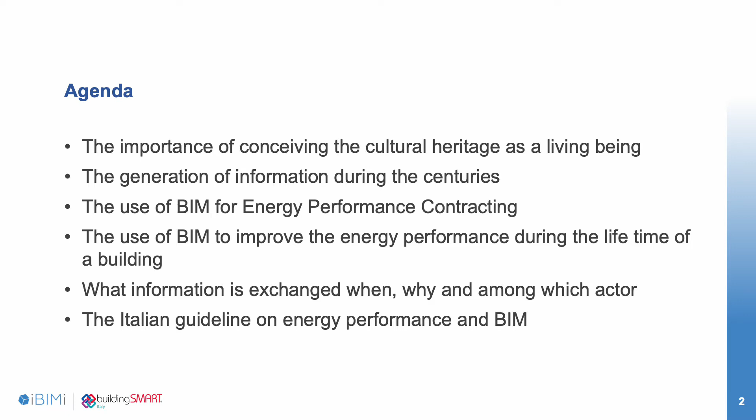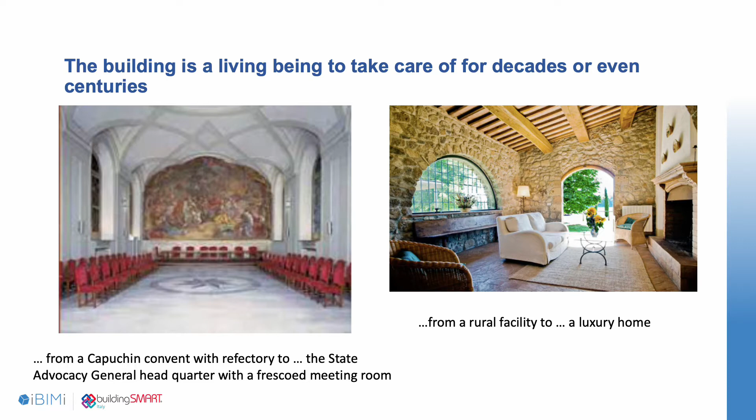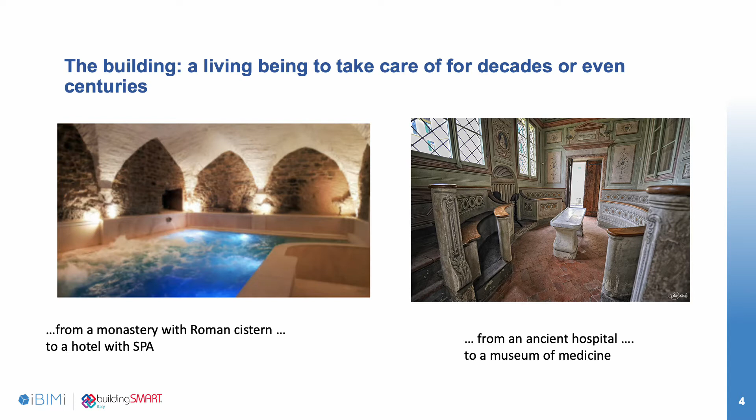A building may have been conceived and built in the Middle Ages, then be adapted in the Renaissance, and nowadays may need a change of use or energy requalification. But even more modern buildings that were built 20-30 years ago may need renovation. All the information that can be collected from what exists, if available, will be in analogical format, and in any case it will not directly be processable by software.

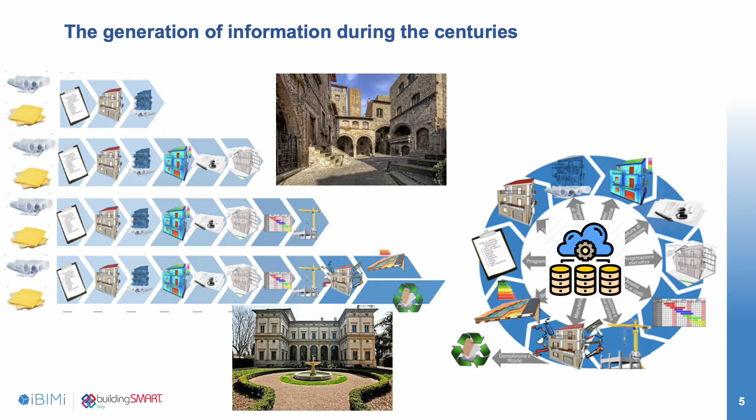Therefore, BIM for existing buildings means, first of all, to collect the information in a systematic way, to verify its correspondence with the reality, and then to make informed decisions based on simulations obtainable with software.

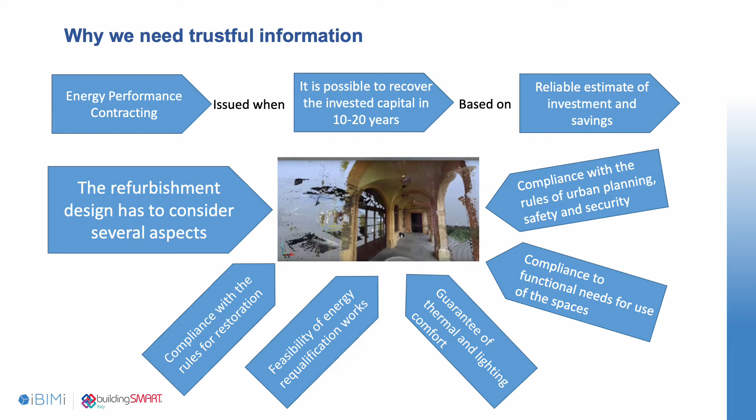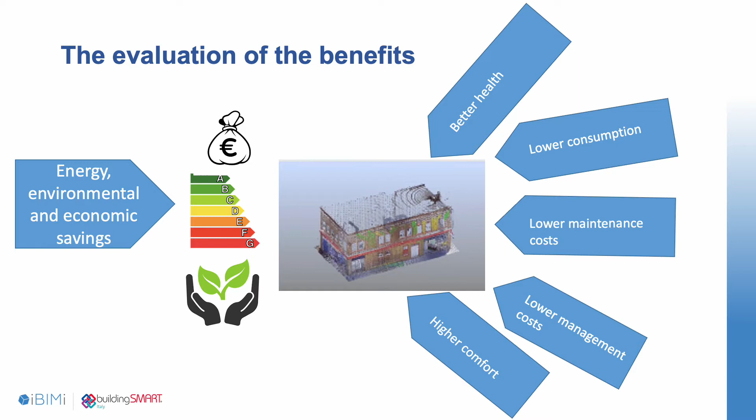On this basis, the evaluation of different scenarios can be made and reliable computational data can be obtained through BIM 4D and BIM 5D for the evaluation of time and costs. This is very important for the owner, who can make informed decisions.

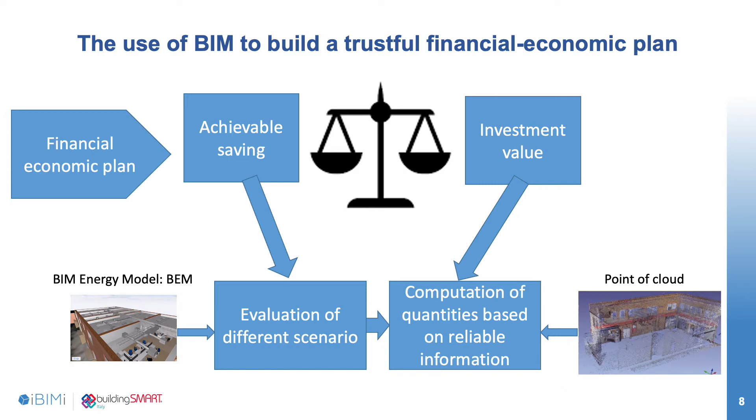BIM is always important when looking at the entire life cycle, as we know that the building sector is one of the highest impact on the environment because of the continuous use of the soil, emissions deriving from the materials used, emissions during the construction, and above all emissions during the use.

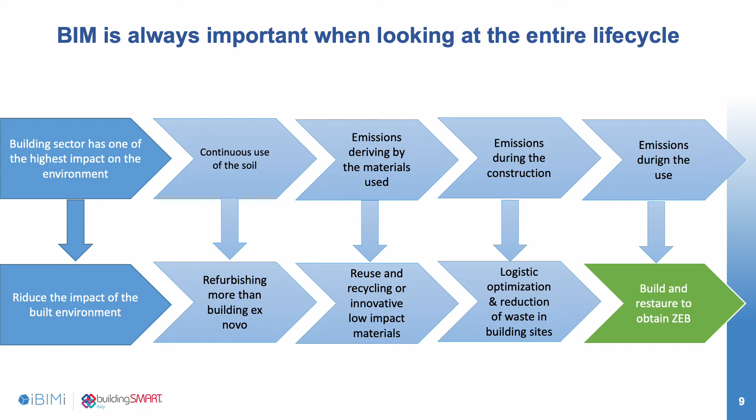Through an extended use of BIM, it's possible to reduce the impact of the built environment because we can do the refurbishment of existing buildings more than build ex novo. Reuse or recycle the materials or use low impact materials. Optimize the logistics in order to reduce the waste in the building site, and build and restore to obtain zero energy buildings.

It has been evaluated that if we look at the entire life cycle of a building, only 5% of the cost is related to the design, 18% to the construction, while more than 70% is related to the use of the building. Therefore, a small mistake in the design due to a wrong assumption will be paid for the rest of the life of the building.

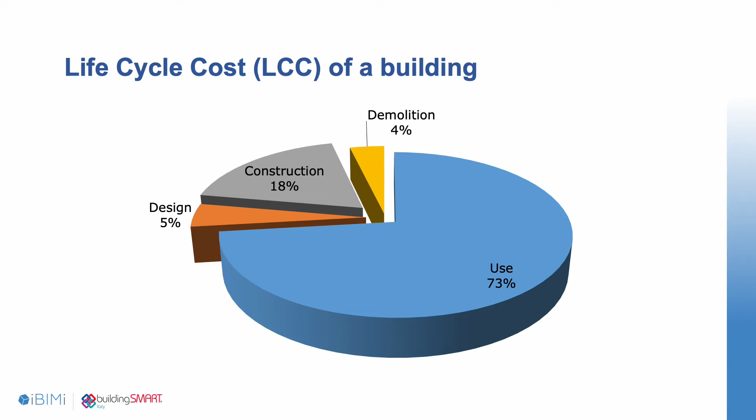The European Commission has published the result of an investigation that has shown that there is a huge gap between the energy performance that has been considered during the design, what has been obtained during the construction, and the real performance during the use. That's why it's very important to provide simulations with trustful data using BIM and have a monitoring system using a digital twin to monitor the behavior of both occupants and equipment.

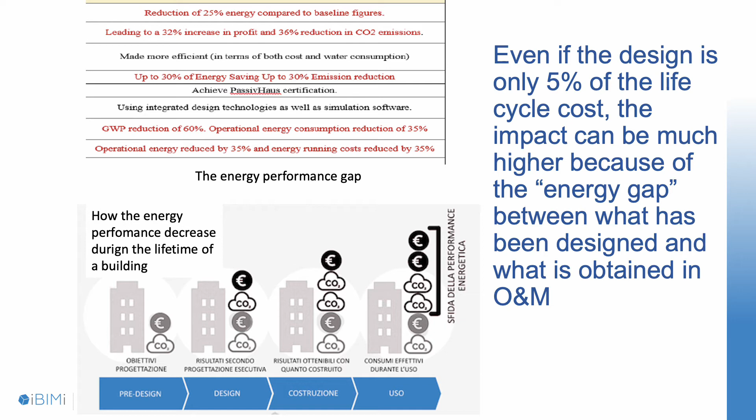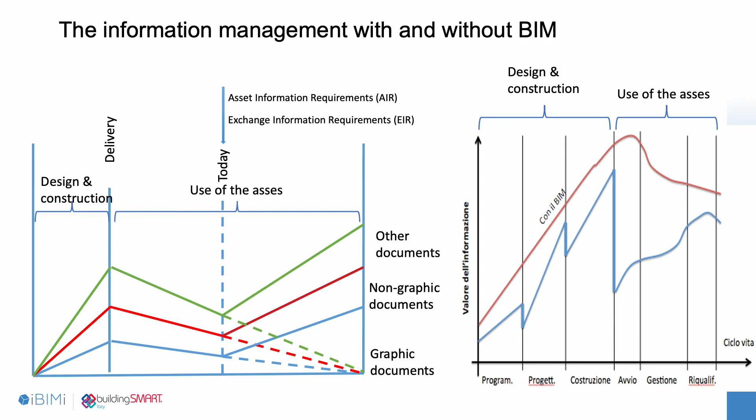The existing condition analysis is the most important phase for the refurbishment of an existing building. Any euro spent in this phase to obtain trustful information is paid back at least one order of magnitude during the next stage of the building lifetime, especially during operation management. The focus in this phase is on the exchange and sharing of information among the different actors.

During the existing condition analysis, it is important that the regulating authority provides the plans and eventually the history of previous refurbishments, besides providing the requirements for energy performance, health and safety. The owner provides the use profile of each thermal zone, any refurbishment work done previously, the electricity bills of at least 3-5 years, and the plant of the HVAC system, if existing, etc.

The architect in charge collects all the information and starts to build the digital model of the asset, verifies the information received, and eventually uses advanced techniques such as laser scanning, thermography, etc. to build the digital model.

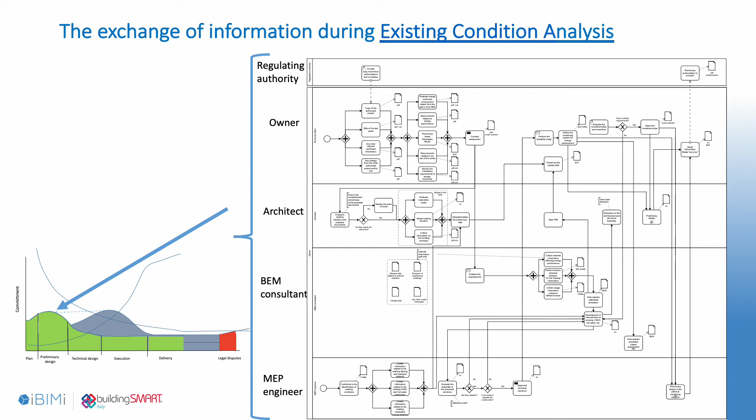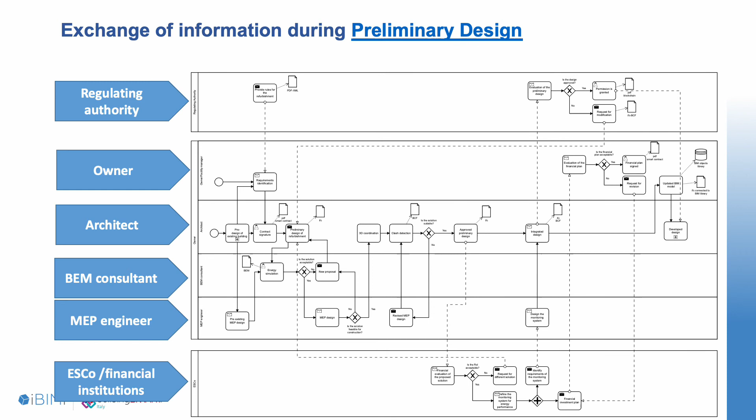Thanks to BIM and the information collected during the preliminary analysis, this process will be very interactive and fast.

The main output of the developed design phase will be a more detailed refurbishment plan that will leave less room to mistakes due to incomprehension and/or design errors as a consequence of interference between architectural and HVAC plans.

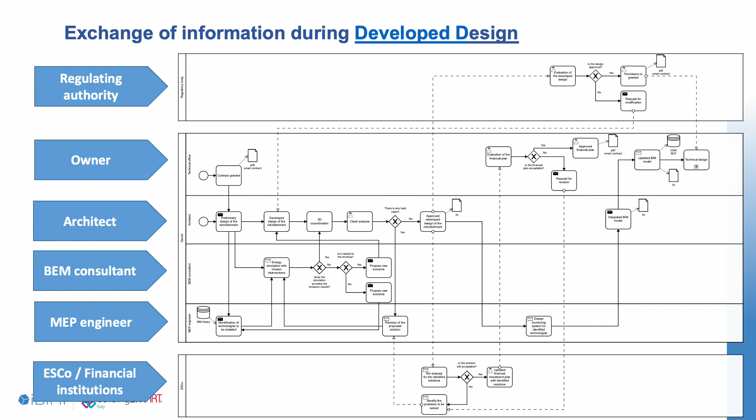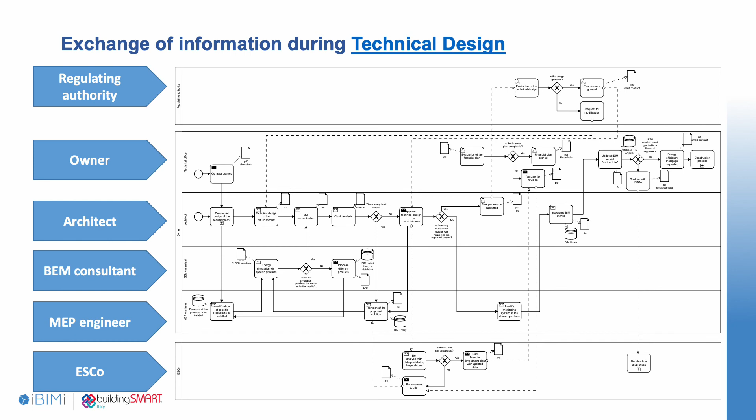During the technical design, all the choices will be frozen so that the financial plan will be even more detailed. The model of the refurbished asset will be enriched with all the information related to products and equipment that will be used during the construction phase. This model will be the base of the contract with the constructor.

The construction phase is the most challenging. Usually, constructors are not very digitalized and they interpret the design more than executing what has been decided in the technical design phase. It is therefore important that the constructor knows how to read a BIM model, and if any modification occurs, he promptly communicates it to the owner's architect in order to have a real digital twin of the building.

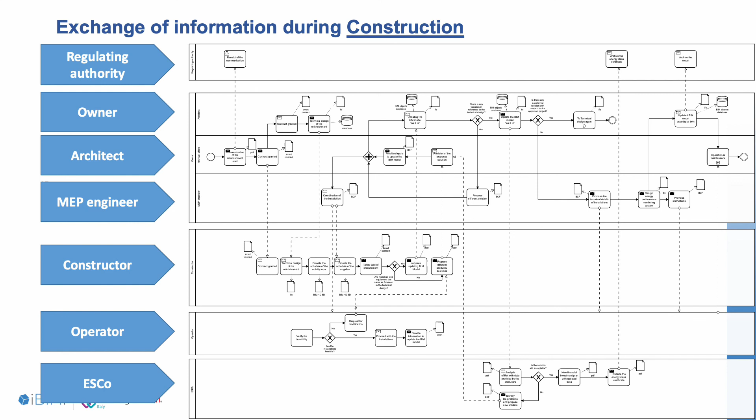In this phase, the role of installers is important too, as they need to provide in a digital standardized format all the information needed to manage and maintain the installed equipment, and also information on the final disposal. We know how costly maintenance is when any information about the equipment is missing or not updated.

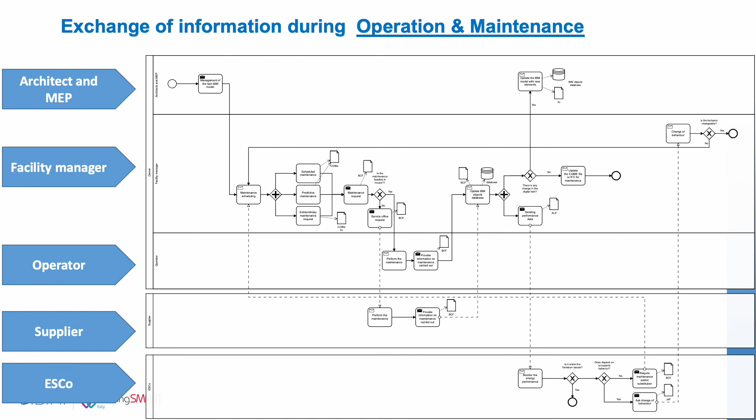If everything has been realized as described, the operation and management will be very smooth, as anybody involved in the management and maintenance will find all the information in the right format whenever needed, even years after the refurbishment has been completed. What I have presented is better explained in a guideline that can be freely downloaded from the Italian buildingSMART chapter website.